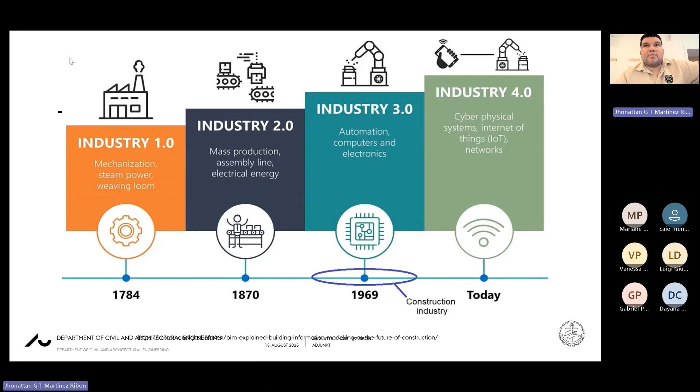To have a digital twin that responds to changes in planning and control is a massive work, also because most of the time you don't have this information. You will see what has been done. Recently a paper was published in Automation in Construction. You can read it and see what the state of the art is in this area now regarding planning and control using digital twins.

Okay, what is digital twin? I will be fast in this area for sure. Professor Dayana has explained it to you many times, but there are many definitions of what a digital twin is, depending on the author or companies. A digital twin, for example, could be a digital representation of a real-world entity, and it also needs to have a connection, right, between the real world and the virtual world. Also, for example, Microsoft said that it is a virtual representation of a physical object or system across the life cycle using real-time data, to enable understanding, learning, and reasoning.

Okay, most of the definitions here have some common terms. The first one is a virtual replica, and the second one is real-time data, right? It's how the physical world can share data with the virtual world, and in the opposite way as well, right? Because you don't have a full digital twin if you don't have the connection between the virtual and the physical as well. It's not only the physical and virtual, it's also the virtual and the physical. This is what we are going to see in the next slide, for example.

But these are some examples of digital twins in different industries: in aeronautics, in the car industry, in the manufacturing industry, and also digital twin cities, right? We have digital replicas of the performance of cars and planes, and we can play with the digital replica in order to simulate different flight scenarios or different crash scenarios. We can model, for example, some scenarios or risk analysis with cities.

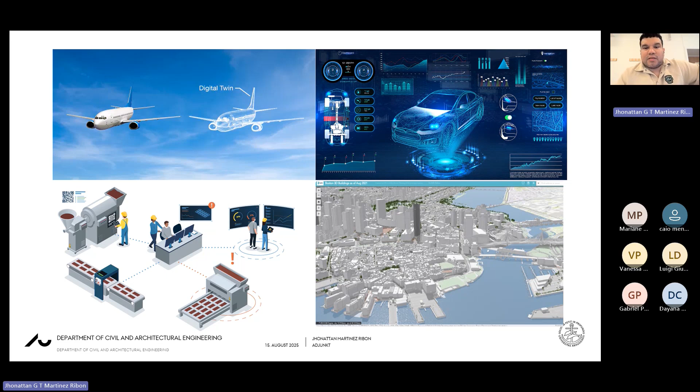Then they have a lot of sensors distributed around the city, collecting data that at the end transforms this into a kind of digital twin, once they use this data to simulate, predict, or change some parameters and see what the behavior of the physical asset is, right? And this is something that happens in many European countries and in Asian countries as well. In the United States, they also had some attempts at doing that, but public data is very sensitive and it's not easy to get data from people and also for public buildings, etc. And this obviously limited the development of the digital twin system.

How we can use, for example, the position of a worker, longitude, latitude, and altitude, and then transform this data from the workers into a safety indicator, into a risk indicator, to understand what was, for example, the probability of risk in a certain area based on the location of the workers and the time that the workers spent in that area. You see, it requires all the positions of the workers, that is the data, longitude, latitude, altitude, and also requires information from the schedule to know what the workers are supposed to perform in certain periods of time.

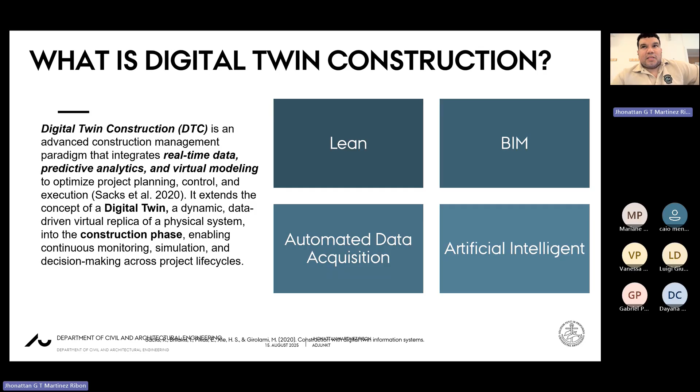It's divided into four axes, right? An axis about lean that includes the planning process, another axis about BIM, automated data acquisition and artificial intelligence. He believes that all these four components are mandatory to be implemented into a digital twin if we want to orient this digital twin for production planning and control. And this is the main visual concept of what he thinks a digital twin construction is.

And you can see here how the physical asset is transformed into a digital twin through different stages, in which first we collect information from monitoring, using sensors, and then from this monitoring system we collect raw data. And this raw data, using the database and what we call a complex event processing system, is fused with other data in order to have information and knowledge.

But the interesting thing here is that, in order to understand if the production system is underperforming or is on time or is delayed, we need a comparison with what we planned initially during the planning process of the project. This kind of digital twin system requires information about what is happening now, what we collect on the site with sensors, with drones, with information that the workers can provide using apps, together with as-planned information and as-designed information from the BIM model.

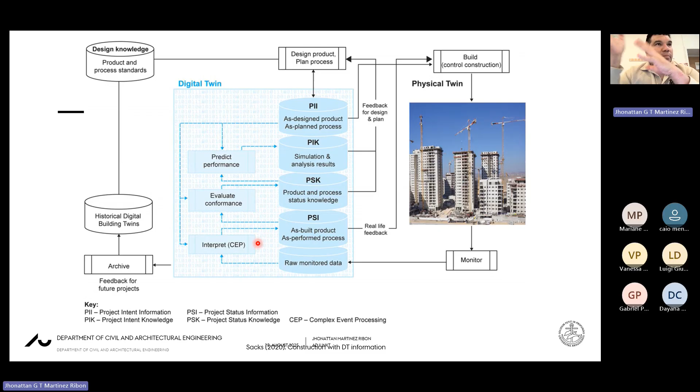In this case, because we built a platform based on that, we use simulation to try different alternative production plans, and we try to see based on the simulation what the best or optimal plan is to solve the problem of delay, quality, etc. And this is all about the main concepts of the digital twin.

And you see that the system also relies on historical information, because all the time the system is running or collecting data from the users, the crews, the suppliers, etc., it is storing the information in a historical digital twin, in which this information is reused for the next development, for the next phase of the project, or for other similar projects.

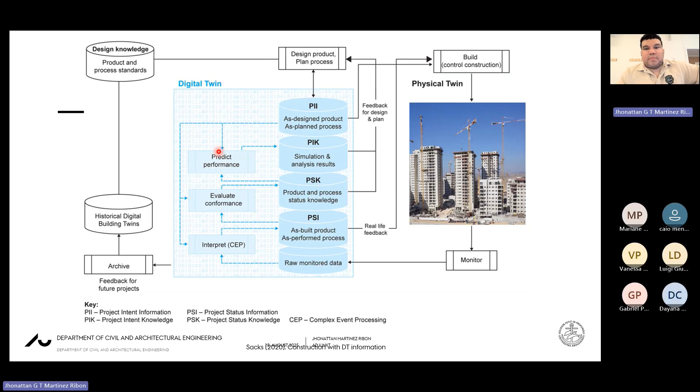And maybe some of you will ask yourselves, okay, but is there enough technology that can help me understand the current status of the site? Because the current status of the site is huge, right? You need to know, for example, the physical progress. You need to know the amount of work that was performed, the amount of work performed per crew, the amount of work performed per stage.

But together with the amount of work, you will need to compute some KPIs from the crews, right? For example, productivity rates, production rates, probabilities, for example, of bad quality or waste of materials. Or you need to also, because this system also includes the area of the logistics.

The logistics is important. You have material delays, this will have an impact on the production plan that you had available. You will need to know then what is the probability of delay of a certain delivery company or certain company that delivers the main construction elements of your project.

The technology actually exists for most of the things that we have been talking about, to know the productivity of workers, etc. But the technology most of the time is not compatible with each other, right? You see, this is an analysis that Professor Sacks with another PhD student made in 2021, analyzing all the tech

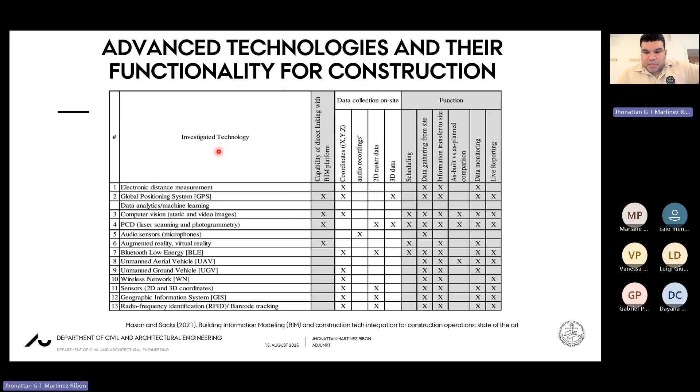Yeah, these are the technologies that are core, obviously, to get data from the site. You know what a GPS is, etc. I'm not going to explain anymore. And what are the functions and how they can contribute to the scheduling, data gathered from the site, data monitoring, etc. It's a good paper if you want to update your knowledge on the technology that already exists. This is a good starting point.

And okay, you saw that there are a lot of things to making a digital twin system, data connection, sensors, etc. But this already exists. Is it still possible to make the kind of complex system that I tried to explain before? Yes, I can say 75% actually, because implementing in real life is difficult. We implemented it in demo cases actually. This project finished in 2024, last year actually. And this project was funded by the European Union.

The idea was to build a digital twin system, right, a platform for construction management that implements lean principles, reducing operational waste, shortening schedule, reducing costs, enhancing quality, and reducing carbon footprint. You see, it's a very ambitious project. And when you target these ambitious indicators or goals, it's very frustrating when you don't get them, right? It's because this project tried to cover all the problems that we had in construction management.

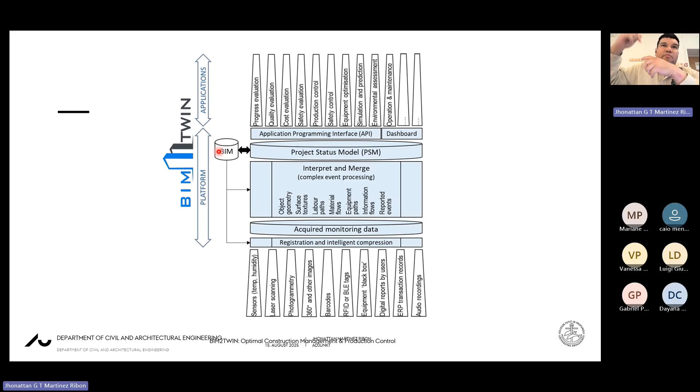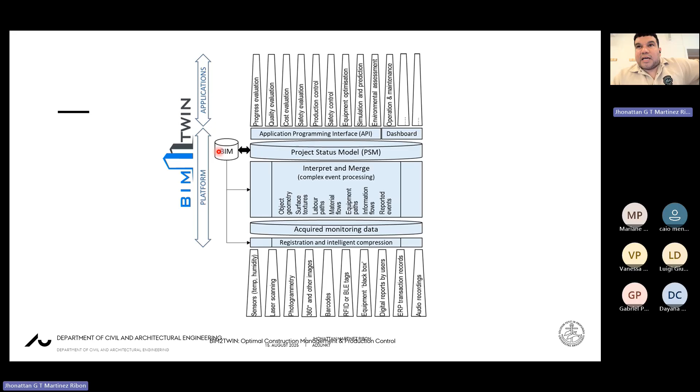And this apartment belonged to a broader location, which is a floor, and the floor belonged to a broader location, which is a building, and the building belonged to a residential development, right? And all the information of the data that needed to be collected to understand this level of granularity was published in a data schema.

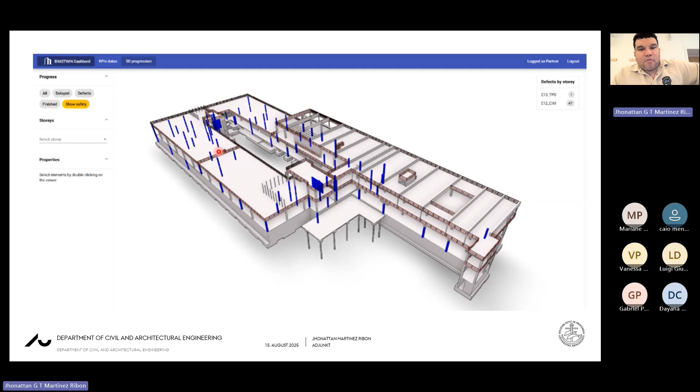This is the first part that you need to make before you begin to play around with the digital twin. These are some screenshots of the platform in which you could see what was the physical progress. You could filter by week, by month, by day, what were the activities that were performed and the elements that were built, etc.

To make this possible, we needed to distribute the work between different institutions. For example, one institution in that case was the University of Cambridge, which was responsible for using LiDAR systems in order to detect the physical progress of structural elements, using drone flights and also terrestrial LiDAR to understand, okay, this element was built or this was not built.

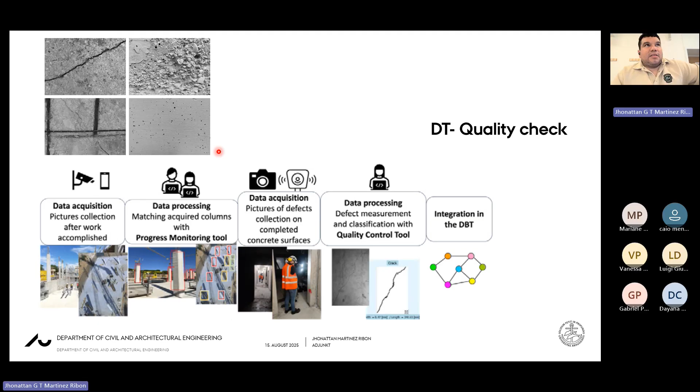Also, we had another university. I don't remember specifically. I think this is the Italian university. No, this is a Spanish institution, which was collecting information about quality and quality checks in different processes, right? Using computer vision.

There was another institution in the project. This institution was from Germany, using data acquisition cameras, software analysis, and data visualization in order to understand the position of the trucks, of the heavy machinery, in order to understand the productivity metrics, to understand the value and non-value time, to feed this data and information into the digital twin system.

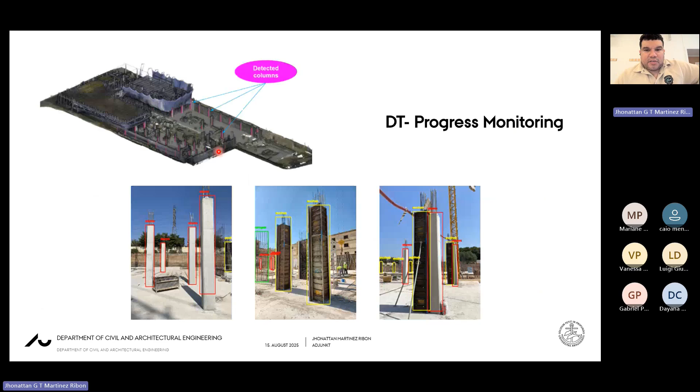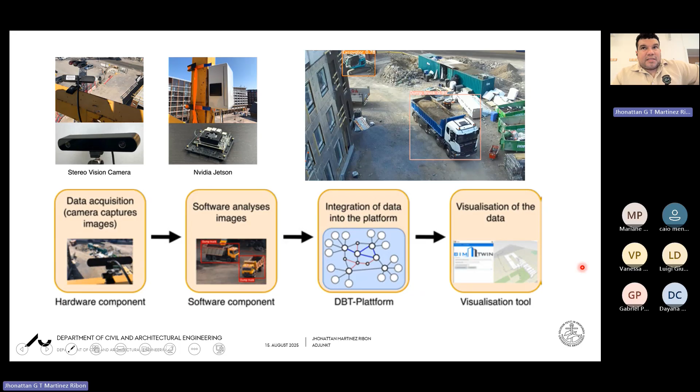And you see all these solutions that were proposed by each university and institution needed to be integrated into the digital twin platform, right? But this data and information that they provided with the sensors was defined initially by the ontology, by the data schema of the system.

And in my work package, in the part that I worked on in Israel with Technion, we developed a simulation system, right? And this simulation system was connected to a digital twin. And as I told you before, recently we released the paper. I can send you the link later, and you can check most of the things that I am explaining here are in the paper, and you can further elaborate in some areas. But we created a simulation system that was connected to the digital twin.

And this was the main contribution because at that time, when we began to write the paper, that was almost 2 years ago, there was no simulation system connected to a digital twin platform that had the capability to adapt its assumptions based on real-time information. Because the novelty or the idea of having a digital twin is that you can rearrange whatever you want to rearrange. In this case, it was the production system design.

It means the amount of work that needs to be performed, the amount of crew that will work for a specific day, the amount of material that will be used, in real time based on data that you collect with the sensors on site, right? And we developed this system.

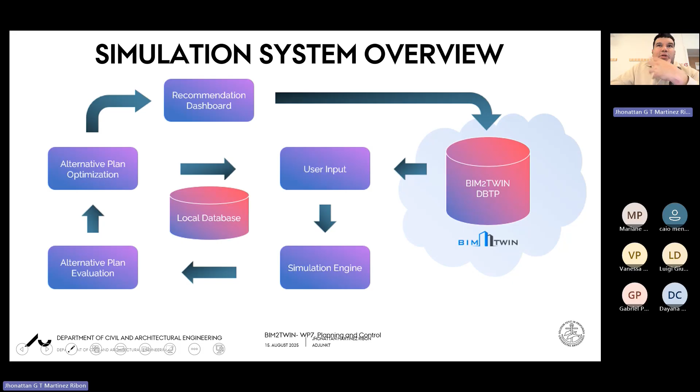As you can see, the system is integrated with the digital twin and has a user input interface and a simulation engine. We had an alternative plan evaluation system in which we evaluate different options, right? Every time, the simulation generates different options based on the initial parameters that we modify. And then we post this information in a recommendation dashboard. Yeah? And this is the data structure, how we conduct the process of the simulation.

There are many types of simulation. I assume you have been reading several papers about digital twin, production planning and control, construction safety, and you can see a lot of simulation applications, right? You can see optimization algorithms. You can see, for example, Monte Carlo, etc. But this specific simulation is based on something called agent-based simulation.

And this agent-based simulation is something that is not so popular in the construction domain because it's not an easy task. It cost us like 2 years of work to understand the agents and the behavior of each agent in construction, how they interact with each other and how they produce the emergent behavior. It means the activities, right? Because if you recap a little bit the construction process, the only way that the crews perform a task is, most of the time, when they receive instructions from the site engineer, right?

There is a relationship between the site engineer and the crews, or maybe the crew leader, or the subcontractor. Someone needs to give instruction to another person in order to conduct a task, and this is all about human interaction. We map all this human interaction: when the site engineer gives instruction to the crews, what happens if the crews fail in performing the task, what is next?

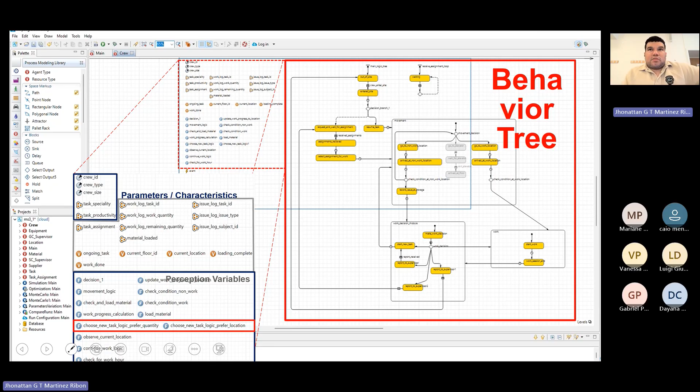If not, you need to provide the probabilities to the system, because each company, for example in Brazil, may have different probabilities than companies here in Denmark or in the United States. To map all these behavior trees and probability distributions, we use AnyLogic. It's software that gives you the possibility to simulate using three types of simulation: discrete event simulation, agent-based simulation, and system dynamics. You can combine all these simulations together to have a robust picture of the system.

What was the purpose of the simulation? As I told you at the beginning, it was to rearrange the production system. But why rearrange the production system? Imagine you are building a building. Most of the time, you have something called decision points. Decision points are points in which the digital twin or the person in charge detects anomalies regarding the project performance. Okay, I had a delay of one week. What can we do?

You stop here. The traditional method is to gather some people from the job site and other people that understand the problem, have a meeting, present photographic evidence, the plans and the budget, and then try to come up with a solution that fits the current budget and tries to avoid or minimize the consequences of the current problem. But currently, we don't have a tool that evaluates this decision.

Evaluate the decision: if I take this solution that increases the number of crews from 2 to 3, what is the consequence in cost, time, quality and safety? Any modification of the production plan can have a consequence. One of the tasks of the simulation system is to evaluate the consequences of the decision and come up with the optimal plan the user can implement. Using a user interface that I will show you in one or two slides, you can see the parameters they could modify and come up with different plans.

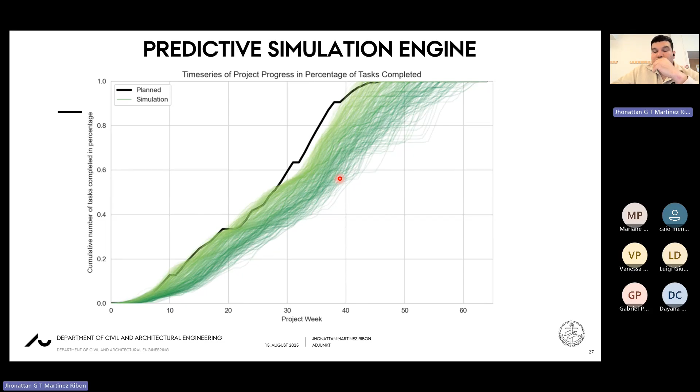Every time the simulation system receives this data or modification in the production plan, it generates different production plans based on the probabilities included in the system, and also ones you can introduce manually, and produces thousands of plans. At the end, you have a compilation of these plans, and then you have not 1,000 but 5 or 6 plans summarized based on the changes you make in the user interface.

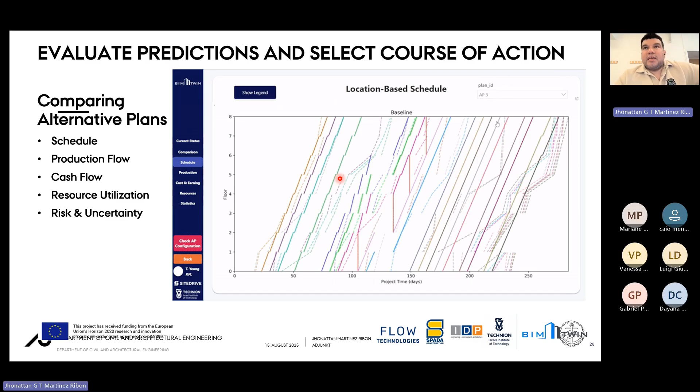What you are watching here is one of the interfaces of the system, a video in which you can see the current status first to analyze if there was a deviation or not, a comparison view in which you can compare the different alternatives you created, and probabilistic graphs or statistics about the probability that this plan can be performed on time, etc. And this is how the system works. On the BIM2TWIN project web page, you can find this software available if you want to play around with different alternatives. These are some screenshots of it.

For example, the system works in: okay, I want to generate some plans, or I want to generate some simulation departing from this specific point of the project. Then you will have some information about the current status of the project. You can see the work dependency, the work quantities, the cost breakdown, etc. Once you understand or have sufficient situational awareness about what is happening, then you will go to the plan configuration, in which you can try or create different plans, right?

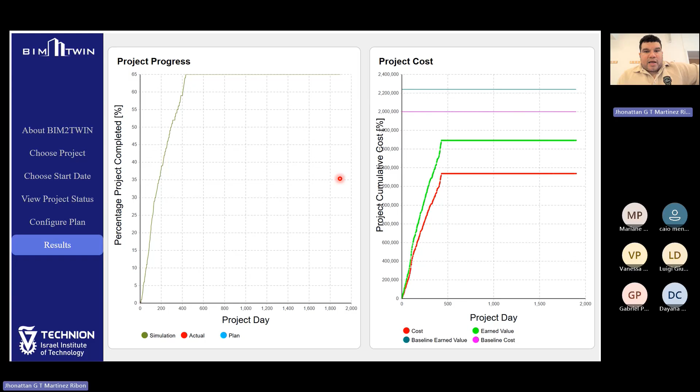And once you create all these plans, then the simulation, a hidden simulation, because you cannot see the simulation process, it's in a computer, begins to calculate all these plans using the behavior trees, the probability, and the parameters that you introduced initially, right? And this is basically the end of that.

Okay, and to finalize the talk, six months ago we published a paper about toward the adoption of digital twin construction systems in Latin America, right? And this is something that could be useful also for the Brazilian construction industry, or for you if you want to implement digital twins. And you will see that to implement this digital twin system, the company needs to have a kind of readiness level toward the implementation of the digital twin system.

If you saw the BIM2TWIN project, actually, what we made was a platform. It's something that we access online. We had user credentials. You had the menu in which you can see the project progress. You can access the simulation. We had a system compile everything into a single database in which we retrieve data from the different applications, right? If you see the current development of the construction companies in Brazil, in Colombia, in which we made the study, what you see is implementation of different technologies, different software, etc., but nothing unified in one specific system.